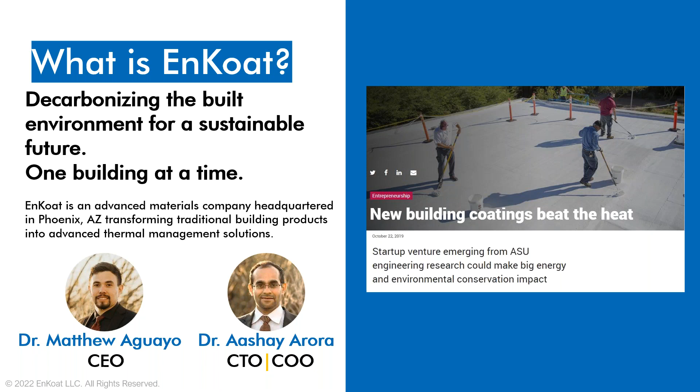And what a journey we've had talking to all kinds of stakeholders to really get an idea of what the landscape looks like for new building products, and what every stakeholder throughout the value chain, whether it's a raw material supplier, a building developer, or a contractor, what are their pain points that we can ultimately solve? So with that, let's see where it all began.

Both of us were grad students at Arizona State University, and the material that we were working with was concrete. I get it all the time, like, concrete, isn't that just a pavement or a sidewalk? But it turns out concrete's actually one of the most complex materials on the planet. It's the second most widely used material on the planet, the first being water. And what we did was we looked at these systems from the chemistry and physics point of view on a micro scale, and we scaled it all the way up to actual structures.

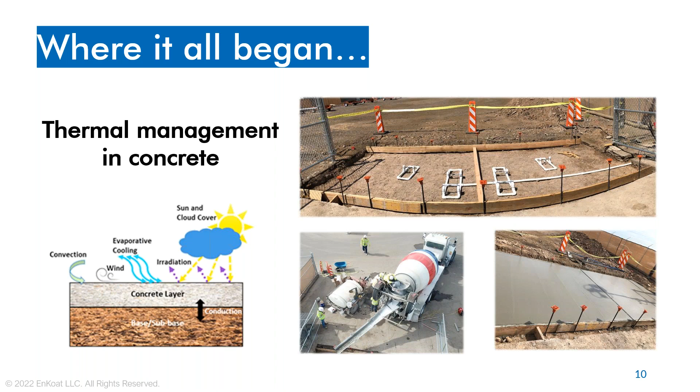But we thought, you know what? This is such a great technology. Where can we solve an even bigger problem? And that problem comes with buildings. Right now, climate change is here, it's happening. That's leading to extreme temperatures. We're talking about heat, but also extreme cold temperatures like what's happening in Texas. Whenever temperatures rise or drop to extremes, you have higher energy consumption because your mechanical equipment has to run more. And this is ultimately leading to higher energy costs. Right now, the US spends over $400 billion annually to heat and cool buildings.

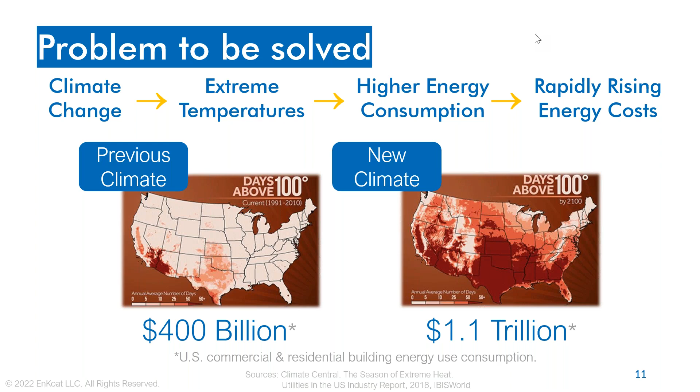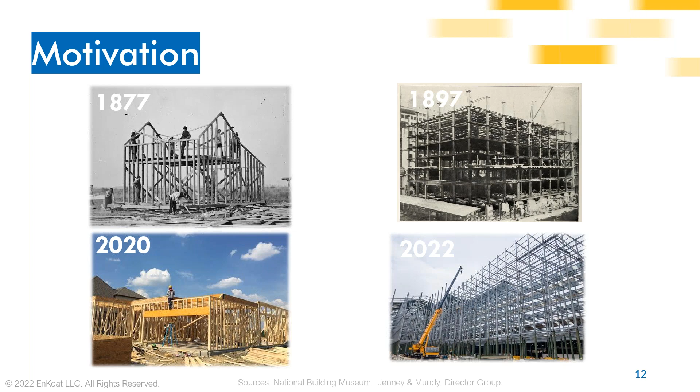For us, the motivation is, can we turn these existing building products that go into buildings into thermal management solutions? Can we give them an additional functionality? As I'll get into with paint, we're so used to painting our homes a specific color, but what if our paint can actually help regulate the temperature inside of our buildings? Now, other people aren't focused on the problem like we are.

There are other high performance solutions like thermal mass construction, panel construction, air sealing. Each of these is great at improving the energy efficiency and thermal resilience of the envelope, but they're not mainstream. You don't see much thermal mass construction or panel construction, and the reason is that builders, and stakeholders in general, are hesitant to try something new. Even though each of these are great technologies, there's still some hesitation, and each comes with its own benefit. If we look at thermal mass, you use concrete to help mitigate the thermal inertia swing between inside and outside temperatures.

Panelized construction is getting rid of the stick frame construction you saw in the previous picture and having a continuous structure that has continuous insulation. You're lowering the thermal bridging that takes place. And then that gets to air sealing.

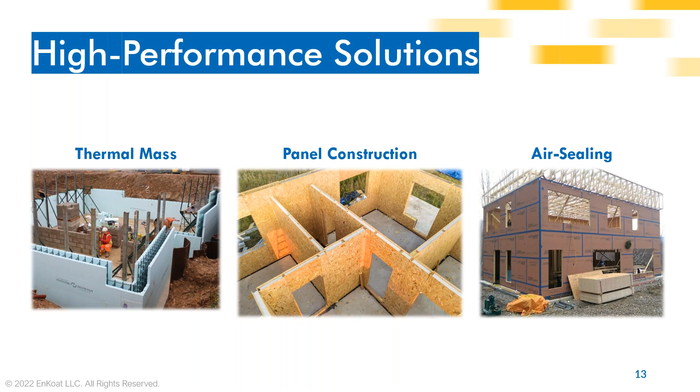So I'm sure you drive down the road and you see a new subdivision being built, and you see the foam siding, and then you see the taped seams. So that is all to prevent thermal bridging of the external heat trying to get into the inside. Well, we decided, let's take our technology and turn traditional products into thermal management solutions, and this is where the innovation comes from. So we'll start out by talking about our adaptive materials technology that we've developed.

What makes us unique is that we've actually engineered and designed this technology for climate-specific applications. Traditional building products, it's a one solution fits all. You buy one product here in Arizona, that's likely the same product that you'll buy in New York, whether that's insulation, whether it's OSB sheathing, siding, what have you. But we really figured if we're going to make an impact, our technology needs to be tailored.

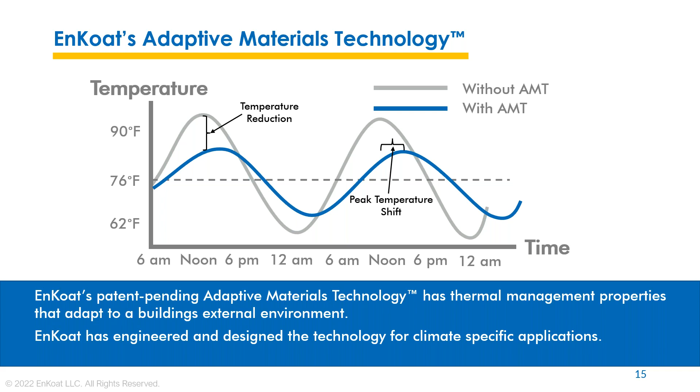So the first product that we're commercializing currently is an elastomeric roof paint that we've integrated our adaptive material technology into. This paint, it's been tested, it's proven, and it's cost effective. The ROI is great for the building owner, which I can talk towards more later. But we started with elastomeric roof paint because we wanted to really hit the problem hard and make the biggest impact. And there's so many commercial flat roof buildings that if you put this technology on there, there's so many benefits, not just for the building owner, but for the environment at large.

And for those of you who don't know what an elastomeric roof paint is, there's other names for it, like liquid applied membranes, fluid applied systems. But the goal is to place a layer of protection on top of your roof substrate to not only weatherproof your building and roof from the elements, whether that's wind, rain, snow, but also UV protection. Here in Arizona, you see that a lot, where the harsh radiant heat can really eat at the roof substrate, whether you have an asphalt shingle roof or a foam roof. So elastomeric roof paint gives your roof an extended life period.

So what does that mean for building owners? Well, it means that the temperatures on the roof reduce. That leads to lower utility bills, and then it extends your roof service because it's having that extra layer of protection. You're getting that extended service life, and it also extends the equipment life.

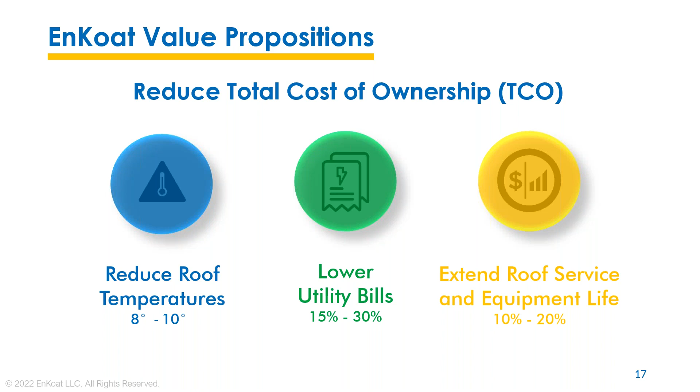But our adaptive materials technology combines all of these and adds an extra layer coming in the form of thermal energy storage. And for those who don't know thermal energy storage, the way I like to describe it is when you put ice in an ice chest, it helps keep your drinks cold. Even when the ice is melting, it's still maintaining a specific temperature. What we do is we select the temperature based on a specific climate. So a state like Arizona would have a higher activation temperature than, let's say, a state like New York.

We've developed these paints through funding from the National Science Foundation and are receiving validation on the thermal performance from the National Renewable Energy Laboratory.

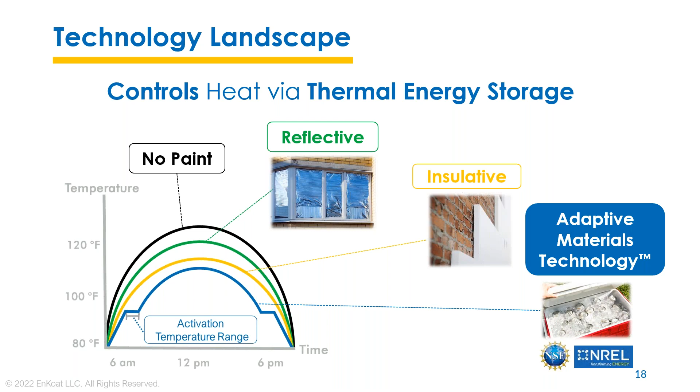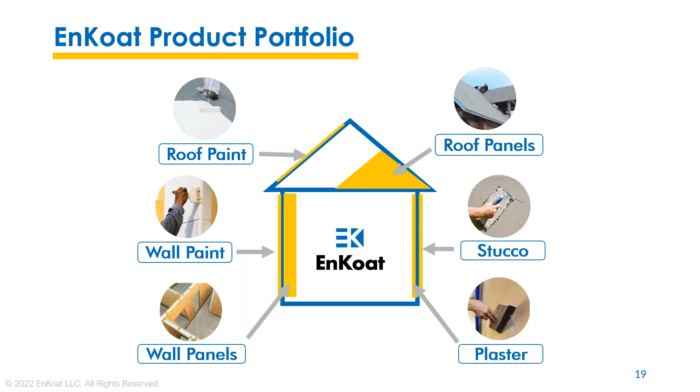So roof paint is our first product, but this can go in any building product. The higher TRL levels are stucco and plaster because when we developed the roof paint, we developed those as well. But we're also working on wall panels and roof panels for the high performance solutions I mentioned earlier.

Now, let's get into how exactly we use data loggers to develop these new types of products. So we have to start small. It's easy for us to say, you know what, we'll go in the lab, we'll mix something and then throw it on a building. Well, if you do that, chances are you may waste a lot of product and you're not going to get the results you want because you didn't start small. And just like our concrete project I showed you early on, we looked at the micro scale level and then we scaled it up to where we're actually pouring concrete.

This is where we started with our paint product and our other coating products. So the idea was, what if we were to take a section out of a building? So if you look at a wall section in a residential home, and here in Arizona, it's a lot of stucco construction. You have stucco on the outside, you have some sort of OSB or sheathing, and then you have your insulation, and then on the interior, you have gypsum board and then paint.

So if we were to take a 10-inch by 10-inch cutout of that, what we'd want to do is simulate if we were to subject the outside, the stucco side, to some temperature, high, low, we'd want to know what is the temperature profile coming through that section. So we use a thermal testing chamber that's able to cycle from -20°C all the way up to 60°C. To get accurate results, we need accuracy in temperature measurements. That's critical for us when we're prototyping new materials. And that's ultimately why we need research grade equipment to do just that.

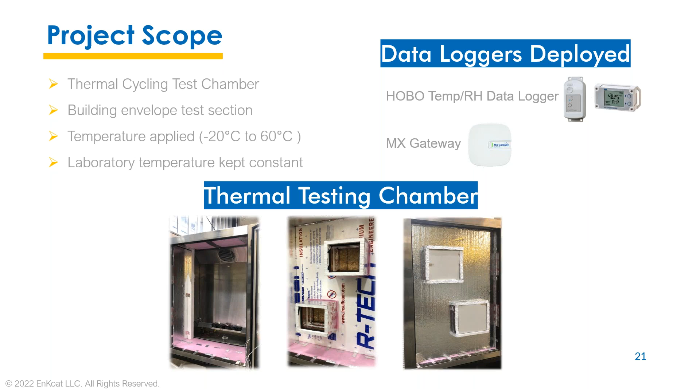But one thing I really liked about this system is, for us, we need to get data fast, and both of these come with an app where through Bluetooth we can get the data right to our phones. But let's say we're not in the lab, what was nice is we're up in our office and we're able to use the MX gateway, which provides us the data wirelessly. So we just pull it right from the cloud. So it's less for us to worry about the equipment and which one's the best. I mean, these worked extremely well for us and got us the data we needed in exactly the fashion we required.

So our sensor locations for prototyping at lab scale, the front view, this is looking at the interior. So the lab temperature was kept constant, and you'll always see two sections, just like our concrete example. You'll have a control, and then you'll have what we're actually testing. And on the side view, on the right side where you see exterior temperature, that's on the inside of that temperature chamber. So if we want to model an Arizona climate, something really hot, then that's where we start. So it's being subjected onto those exterior out sensors. And then immediately on the other side of that layer, we needed temperature so that we can see what the temperature differential was.

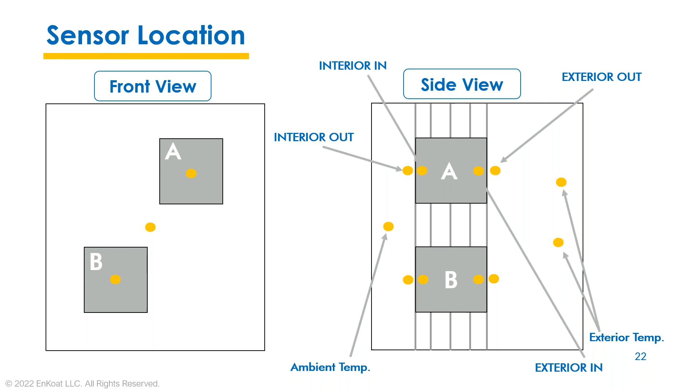And then you have interior in and interior out, where once the temperature has been subjected from the outside, what does that look like on the inside? And again, these loggers allow us to get that gradient profile and compare between. And what we really like, as I said, is the accuracy. I'm talking like less than 0.2 degrees C. And that's something we need because we're looking at a very sophisticated thermal management reduction, and we need to make sure that what we're modeling is what we're finding in these experimental tests. So once the lab scale testing is done and we can understand what that temperature profile looks like coming through the envelope, now we really need to see how does that look at scale.

So we developed 2 test building enclosures. These again are located in Casa Grande, Arizona, so it's a hot, dry climate, and they're identical. So again, one serving as the control, the other serving as our test enclosure. Both of them are identical from the construction, from the roof to the walls to the interior. They have identical air conditioners that were individually metered.

So lab scale testing is showing us temperature reductions, is showing us how much of a peak shift we can achieve. When we look at the next field scale prototyping, this is showing us what is the energy savings we can expect. Because they're the exact same and have metered air conditioning units, we're able to see what that reduction is.

Now, these are about an hour away from our office and our labs, so we needed a way to be able to monitor the data in a remote location. And I should mention that there is no internet here. So what we liked was we used the HOBO Micro RX station, which uses cellular service to collect the data. And with those, we use the RX sensors.

And again, the RX distance is a big thing. For the lab scale, it's all in one chamber, so distance isn't really a problem. But when you start coming out to the field, and these are small field enclosures, but let's say you have like a 1,000,000 square foot manufacturing facility, you're gonna need sensors that can extend a certain range. So we really like how the RX sensors can go over 1,000 feet.

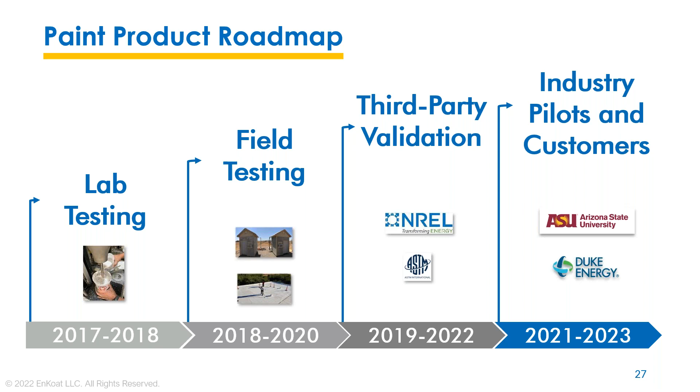Now our roadmap: lab testing we've done, then we move on to field testing. Now we're in the process of third-party validation with our partners at NREL and getting ASTM testing and certified on our products. And we're looking for industry pilots. So we have one with Arizona State University that I'll talk more about next, and a project with Duke Energy in North Carolina. So these industry pilots are the next stage in our roadmap for commercialization. So we've proved the technology, we understand how much temperature reduction we can achieve, how much energy savings one can expect. Now we want to see what does it look like on an operating building.

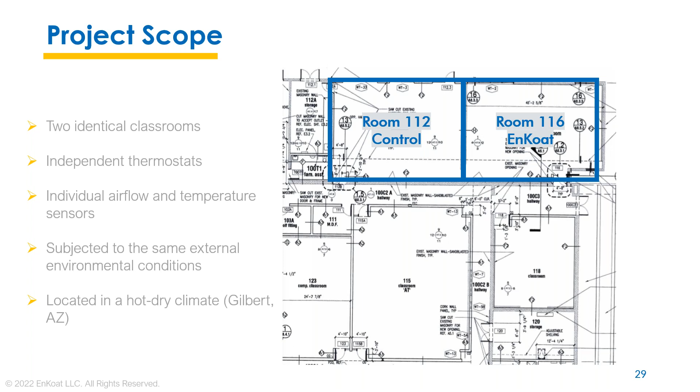So just quickly, our pilot project was done on a building at ASU. The building itself was monitored using a building automation system. There were independent thermostats in each room. The airflow and temperature were monitored individually also. They were subjected to the same external environmental conditions. And I must mention the climate also. So this was located in a hot, dry climate. And the reason I keep mentioning climate is because the products, in this case our elastomeric paint, is tailored specifically for a hot, dry climate.

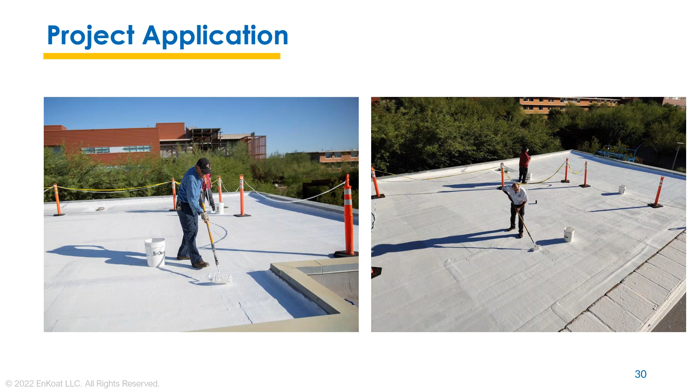The paint was applied how you'd expect, in a roll-on application. And the control product we used was a commercially available reflective roof paint. So anytime we run a control, we always want to run it against what is currently being used. So standard application. And then the results were over a 30% power consumption reduction during those summer months. Because we tailored it for an Arizona climate and the summers here get extremely hot, that is why you see that uptake in reduction. But this paint really acts as a thermal barrier all season long.

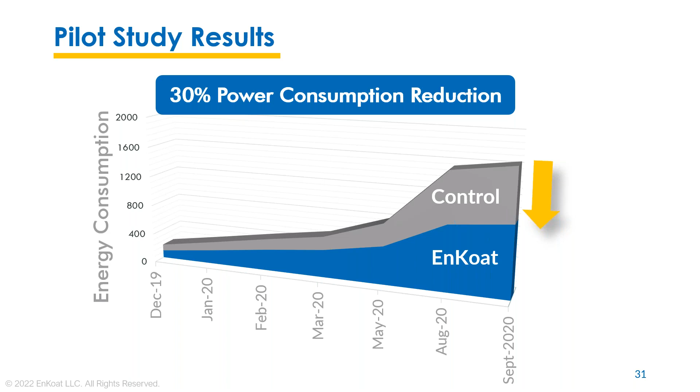Now, to wrap it up, this is the last section talking about technology impact. We really are looking at decarbonizing buildings because what we believe in is that the cleanest form of energy is one that is not created. So if we can make our buildings more thermally resilient, then you're having to rely on less electricity usage.

And ultimately for building owners and operators, we want to help them achieve their ESG goals and reduce their carbon footprint. So the value propositions we offer for thermal performance are that reduction in peak load, shift in peak load, ultimately reducing electricity consumption, saving money. But for the environment, you're making an impact by reducing your greenhouse gas emissions.

Cool roofs have been a technology that has been used to reduce the urban heat island effect. And what we've developed is the next generation of cool roof, one that performs significantly better and is proven and enhances thermal comfort. That's one that most people don't think of, but in Arizona and with these manufacturing facilities, they don't have the sophisticated air conditioning equipment that we have in office buildings or even our homes. They're relying more on evaporative cooling. So comfort for the workers inside is huge.

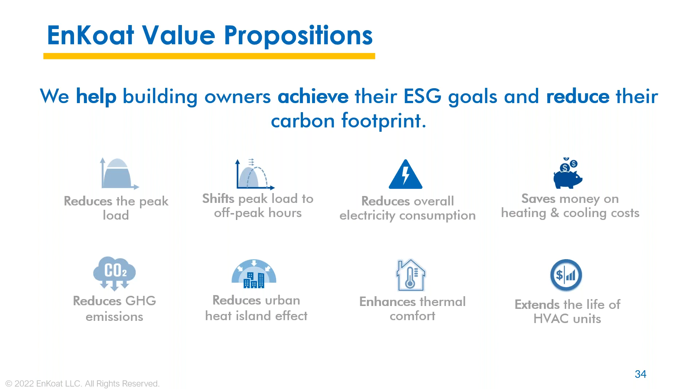Not just comfort, but it's also a safety concern because temperatures can drastically increase during the summer months. And we've experienced that firsthand by touring manufacturing facilities. Whenever it's 112 outside, it's going to be close to 90, 95 inside. And then again, extending the life of HVAC units because they're not having to operate as often.

Now, I appreciate all of your attention. What we're doing is ultimately helping building owners reduce their operating expenses with a superior, simple, and cost-effective thermal management solution. And I welcome anyone who is interested or would love to be a part of our journey.